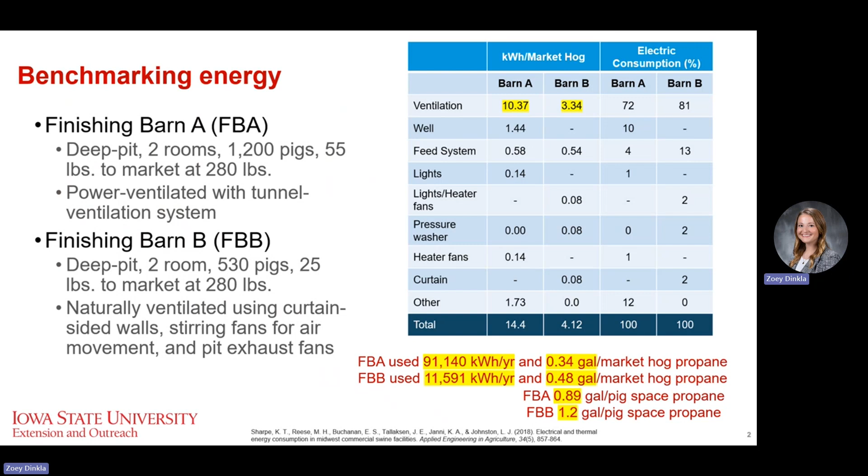Another study here, done about 10 years ago, looked at 30 different farms—different types of farms as well—but gives a more representative sample across Iowa, Minnesota, and Missouri. In general, a good summation from the literature is that roughly 11 kilowatt hours per market hog is a good benchmark to start with.

Propane usage is going to range, as we see here, with sites ranging from Minnesota to Missouri, and it changes dramatically depending on the year. This winter in particular has been unseasonably warm, uncharacteristically warmer than average. But in general, on average, this particular study showed about 0.28 gallons of propane per market hog.

There's lots of numbers on this chart, so it's easiest to highlight and draw attention to what a good goal is. These are by no means exact numbers. Depending on the year, you don't really know how attainable some of these are going to be. But when we're looking at grow-finish barns and wean-to-finish barns shown here, at least from an electrical standpoint,

you're looking at a good benchmark of roughly 25 kilowatt hours per space. The goal for propane usage is obviously going to be very different wean-to-finish versus grow-finish, given the requirement for that younger pig to get started. So depending on what your site's set up as, maybe try to keep it limited to half a gallon per pig space per year, or in wean-to-finish probably closer to around 3 gallons.

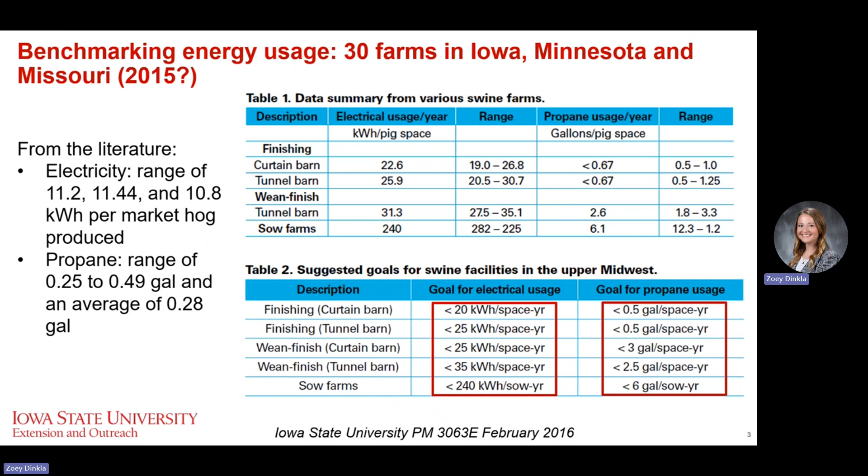Obviously sow farms - I don't know if there's any folks in here with sow farms - obviously there's going to be substantially higher demand, given what it takes for all the zone heating required in farrowing.

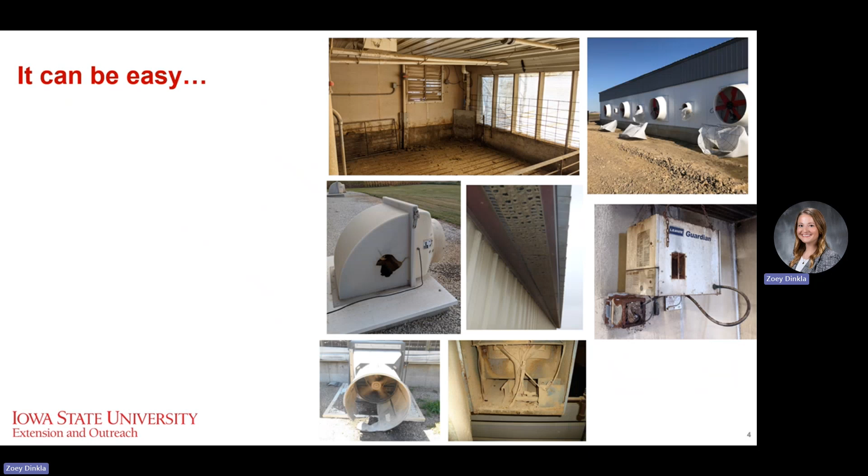So it can be easy - I think in general ventilation can sometimes be made rather complicated, or thought to be rather complicated - but there's lots of different things we can do from a troubleshooting standpoint. We like to think about complex principles with ventilation, whether it's CFMs and properly sizing fans and all that sort of stuff, but there's lots of little maintenance things we can do every day that really help optimize the performance of that ventilation system. And if things aren't working properly, you're never going to be able to really determine optimization within that barn.

So we see plenty of examples here where we've got dirty shutters, broken shutters, a curtain that's maybe not fully in the pocket and creating draft. I think we can all see the pit fan there looks like somebody took their boot right through the side of it, perhaps. Dirty soffits, busted cones off of fans - all different things that are going to drag on the overall performance of that ventilation system.

So obviously we want to be able to manage everything inside the barn as possible, but don't make your job more difficult than it needs to be. If we can do all the little things right and not have death by a thousand cuts, just keeping those little things in check.

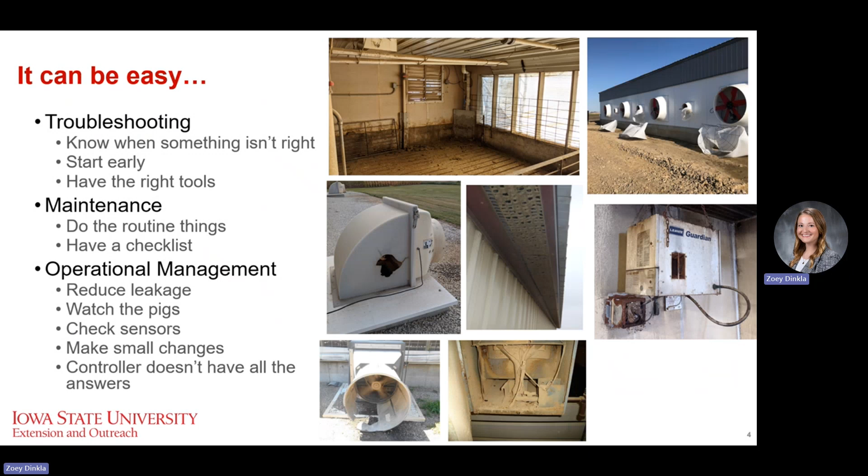So basics of ventilation - this is a thousand-foot view, but we want to draw fresh air in, mix it effectively with the air within the barn, and then exhaust the stale air out. What we're trying to mix is the temperature within the barn - we want to make sure if we're bringing cold air in, we're effectively mixing it with the warm air already in the barn, as well as mixing it with dust and pathogens.

Anything we can exhaust out of the barn to make air quality more favorable for those pigs is going to be important. And at certain times of the year, exhausting gases and moisture is going to be our priority.

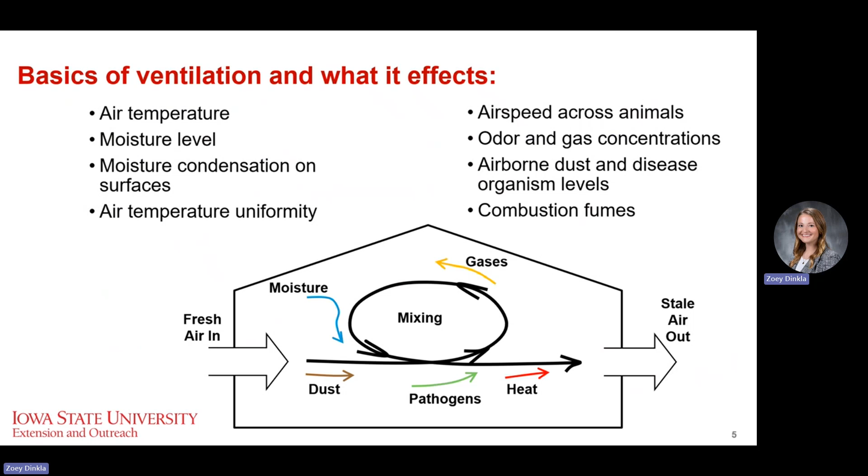So why do we ventilate? Again, a broad overview - outside temperatures exceed our balanced temperature of what we want, so we're ventilating to remove heat from the barn, whether that's a normal increase in temperature from outside or the latent heat pigs produce through respiration or just general heat from having a high volume of very active pigs in the barn. We also want to create, in some instances, a wind chill effect to draw air over those pigs and keep them cool.

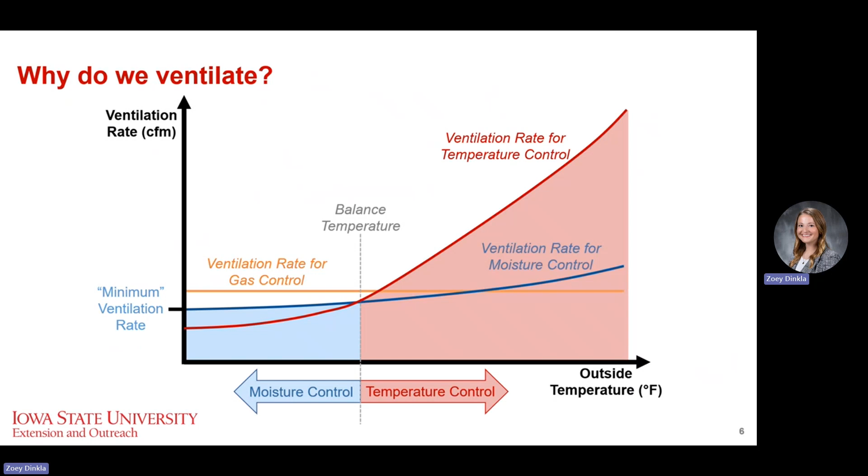Below that, we become more focused on controlling moisture and gases within the barn - trying to keep that at a minimum ventilation rate, keeping relative humidity and any gases at a minimum, while still keeping the temperature comfortable for those pigs in the barn.

This is where it comes in from an energy efficiency standpoint, air quality. We can underventilate the barn and really reduce our costs and propane usage. But what's that going to do from an air quality standpoint for the pigs, from a dust, from a humidity standpoint? It's going to create a more favorable environment for pathogens, and can lead to reduced performance or a nagging cough in the barn. We want to make sure we're providing a healthy environment for the pigs, but reducing our costs and inputs from an LP and electricity standpoint.

Ventilation can consume less energy than heating and cooling. However, there's a certain amount of outdoor air that affects the heat and cooling loads that we have to be able to combat with as well, right?

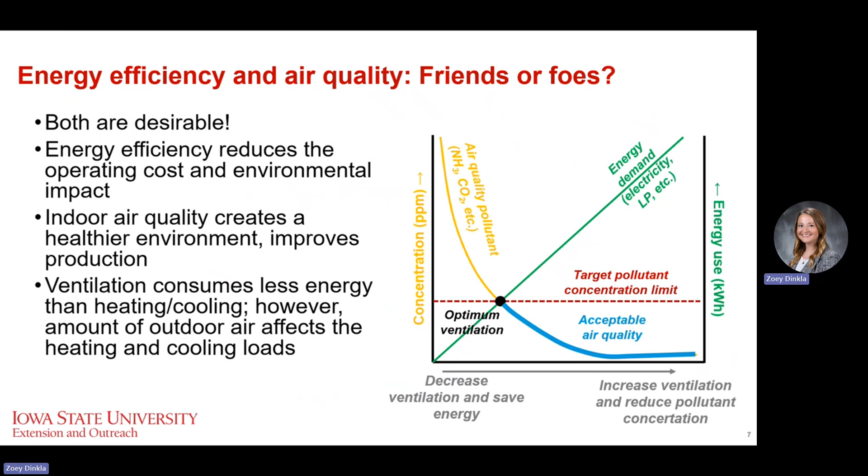The takeaway from this graph is trying to find that black dot, trying to find that optimal zone where we're right above or right below where that target pollutant level is, trying to keep those air quality pollutants at a minimum, but still minimizing our amount of input from an energy standpoint.

Holes in the curtains. Anyone have those? Nobody? Great.

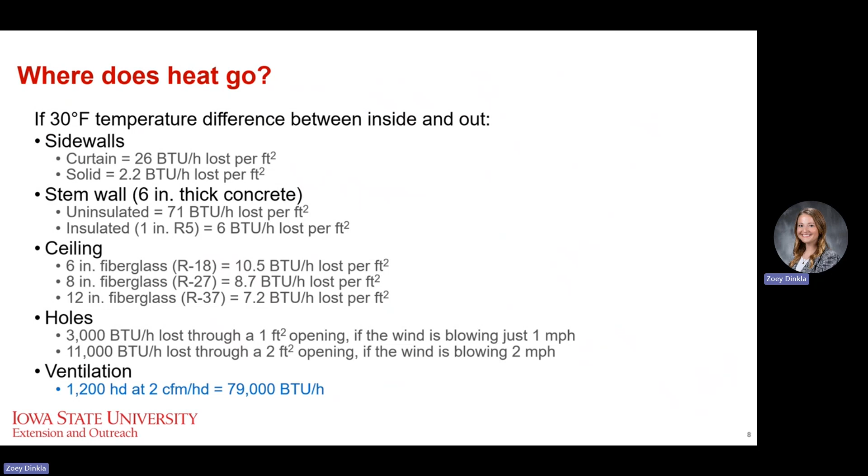So in this case, theoretical calculation at 1,200 head at 2 CFM, 79,000 BTU. I think a gallon of propane is like 90,000 or 92,000 BTU, somewhere around there. So in this case, a gallon of propane an hour, at 2 CFM per head. Again, theoretical calculation shown here.

It's the impact of changing indoor temperature. So the figure there on the left: across the bottom we're looking at room temperature. We've got a wide range there showing different set points where we're looking at roughly 72 degrees Fahrenheit up to 90 degrees Fahrenheit, so pretty wide range, roughly 18 degrees.

Just looking at the difference that room temperature can have on propane usage: if we're looking at 72 degrees Fahrenheit, this is a theoretical model of what we'd expect, looking at 1.5 CFM, we're roughly probably around that 2.2 and maybe up to 2.7 when we get up to the set point of 90. Well, if we're looking at 2 CFM per head, we're already starting at 2.9, and then graduating up to about 3.5.

So basically the iteration there is just to show that CFMs and the amount of heat you exhaust out the barn has a bigger impact than even what variation in this modeled scenario of 18 degrees difference in barn temperature can make. So it's that ventilation and exhausting a lot of that warm air out that has a much bigger impact on propane usage.

A different way of thinking about this and looking at it is with the figure on the right. If we use 2 CFM as our standard and just look at a room at 79 degrees Fahrenheit, and we change it up and down 6 degrees or 4 degrees, what effect does that have on propane usage?

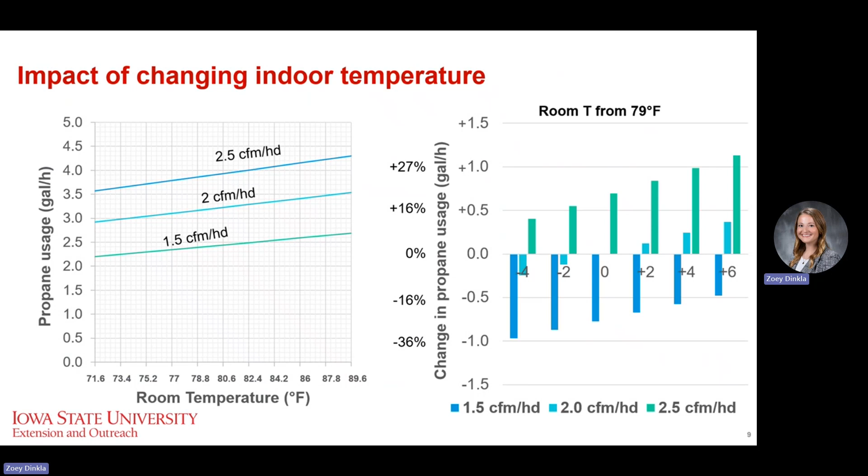Again, a lot of similar information here, but just looking at the temperature difference inside to outside. So maybe looking at 70 degrees difference would have been what we would have had maybe 10 days ago. And obviously the difference we can have there from 1.5 CFM per pig up to 4 CFM per head, again just illustrating the fact that a lot of that air movement can result in a lot of hot air, if you will, going out through the fans.

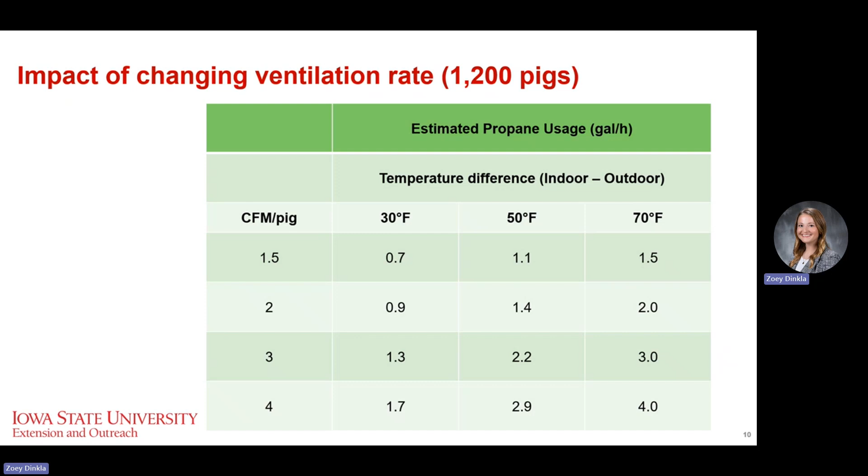So what's the difference between how we design our barn in operation, and how do we calculate that minimum ventilation exactly? Obviously how we design it is going to be challenging because we have to design for different extremes at different times of the year. So we need to figure out what's the maximum ventilation we'll need on the hottest days of the summer, and what's the minimum ventilation we'll need during the wintertime.

So the easiest way from a simple design standpoint is to keep it fairly simple, just using the diameter of the fan times the number of fans you'll need to be able to get that design minimum ventilation.

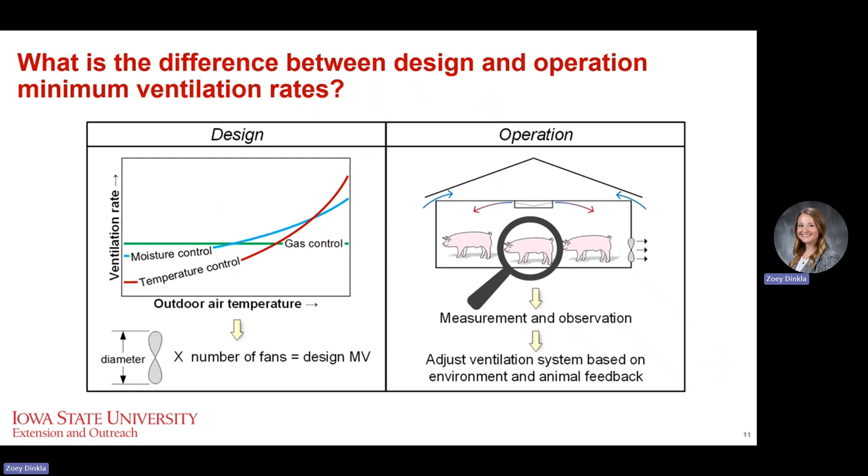And then from an operation standpoint, you're going to utilize the sensors, not only the electronic ones you put in the barn, but also letting those pigs do a lot of the detecting for you, as far as reading their behavior and what their comfort level is in the barn. Looking through there, do the pigs pile? Are they spread out? Is there dampness in the room? What's it smell like? Things like that. So lots of different things you can do from an operation standpoint.

Space heater control, and understanding the differential and offset. Obviously a big piece that we're going to try to keep track of or monitor so we're not wasting a lot of that heat energy going out through the fans.

So we've got a heater on/off, and the difference there, in this figure shown here at 1 degree, is what we would term the differential. And then the offset is going to be from that off time to the set point. The set point is what we obviously put in as our target temperature, and we want to make sure that offset is enough so we don't have a lot of that fresh heated air being put in there and then immediately being exhausted out of the barn.

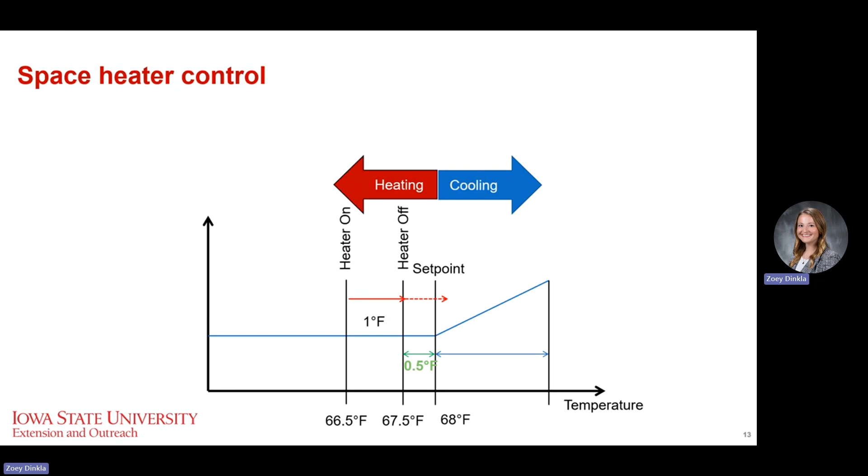So the challenge that can come then is if we have that offset too tight. In this case, we'll show an example at 0.5 degrees. So the previous slide was at 1.5, this one's at 0.5 degrees Fahrenheit. We can overshoot that set point. The furnace will turn on, and then once that turns off, the heat that furnace has put out has to be mixed effectively into the environment.

So in theory, the barn temperature is going to continue to rise. We've just put a bunch of hot air into the building, and then the fan's going to take that out once it gets above that set point, because then it goes into cooling mode and wants to bring the barn temperature back down. So we want to make sure we don't have that too tight, where we're ultimately putting a lot of extra heated air out through the fans.

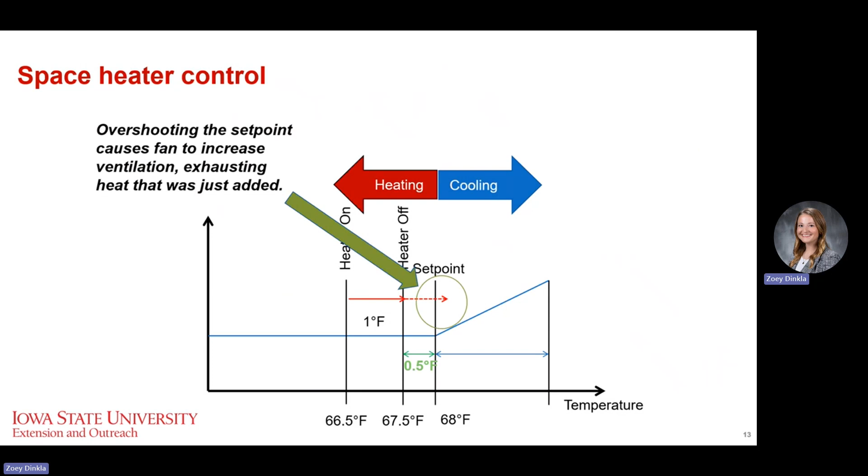So this is a good example to show what the difference is as far as fine-tuning that heater offset. Some recommended heater settings, the ones shown on the left are good ones to start with. The ones here in the graph vary just a little bit, but it's an interesting figure to show.

So to set it up, we've got outside conditions - it's a little tricky to see at the top of that slide - but outside conditions, in this case, steady temperature at 34 degrees. So imagine it's probably an average of a 24-hour period.

The only difference here between the left side and the right side is the offset from the furnace off to the set point. It was 1 degree on the left and 1.5 degrees on the right. So you can see we get a yo-yo, a roller coaster with that furnace turning on and then exhausting air in, which brings the barn temperature down, then the furnace kicks back on.

So the amount of minutes per hour that furnace was running is much more sporadic. At noon, in this particular case, they adjusted the controller set point from 1 to 1.5, and at that point the barn really held its temperature fairly constant for the remainder of that 24-hour period. There was no ramping up of the pit fans, which is what we want to be able to minimize, right?

We don't want that furnace kicking on and the pit fans just pulling that air straight out of the barn. In this particular study, if I remember right, it was like 3.7 gallons per hour of propane burning given the left side of the graph, versus maybe 0.5 gallon per hour on the right side.

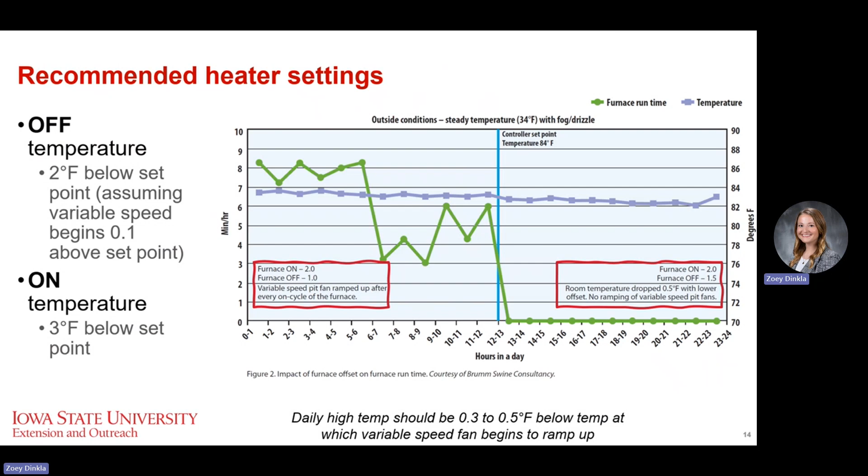So talking about variable speed fans, common questions associated with them: what minimum speed do I use? Does the percent reading on my controller mean percent capacity of the fan? Why does my system behave differently after I've replaced a fan motor? All different things that may come across.

In general, what does 50 mean on my controller? Brett Ramirez kind of highlights this. Does it mean 50% CFM, RPM, the rotations for that fan, 50% voltage, or 50% of some random number? According to Brett that would be true, just because all controllers are going to be a little bit different on what that 50 is going to mean, right?

In general, for variable speed fans, it's important to point out that 50% speed does not necessarily equal 50% CFM. We'll show a graph here that demonstrates that. 50% voltage does not equal the CFM per RPM—every motor is going to react to voltages differently, so we'll show some slides that help illustrate that. And minimum speed should never really fall below 50% RPM.

The thought being there that if there's any sort of static pressure that fan has to pull against, it's going to be a lot less effective at 50%, or if it's got any sort of direct wind going back up against it, it's going to really impede the effectiveness of a fan at 50%.

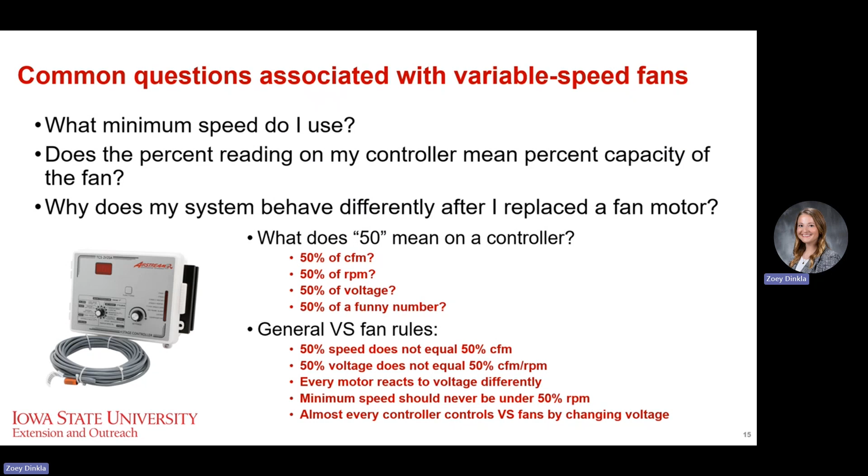So how does your controller work with variable speed fans? It's important to point out, in discussing how we describe the relationship between the voltage that's supplied to the motor and how it ultimately turns that into RPM, that's what we're going to classify as the motor curve. This varies within motor make and model and size of those fans, so different motor curves are going to exist for different sizes of fans and motors.

It's important to be able to select the right curve for the controller to make the ventilation rate increase as smoothly as possible as you're transitioning through, with warmer temperatures throughout the day, to make sure that's a smooth transition as we increase airflow through the barn, right?

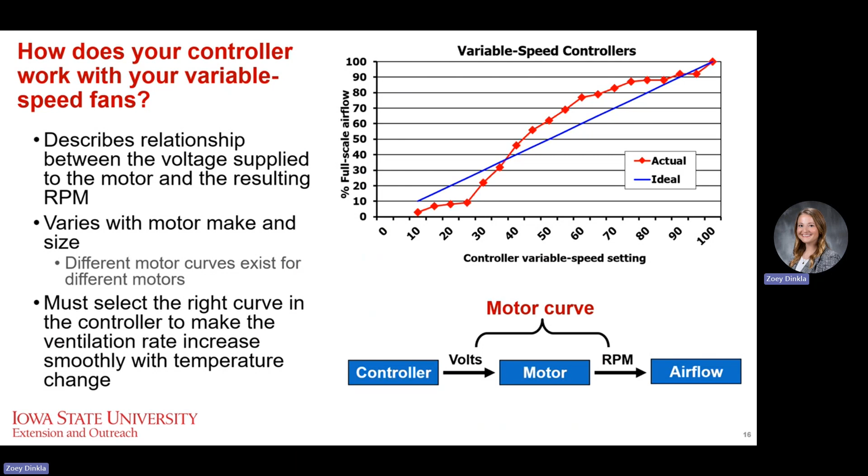So you can see in that graph, as we've got controller variable speed settings, what would be ideal is shown by the linear blue line, and the percentage of that actual airflow that's measured is going to follow that trend line, but it's going to vary a little bit. It's not a perfect science here, but we try to do it as close as we can by controlling those motor curves.

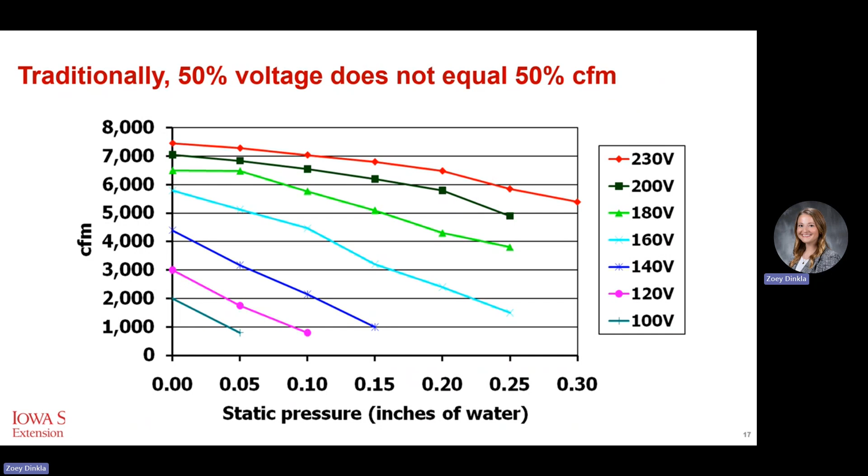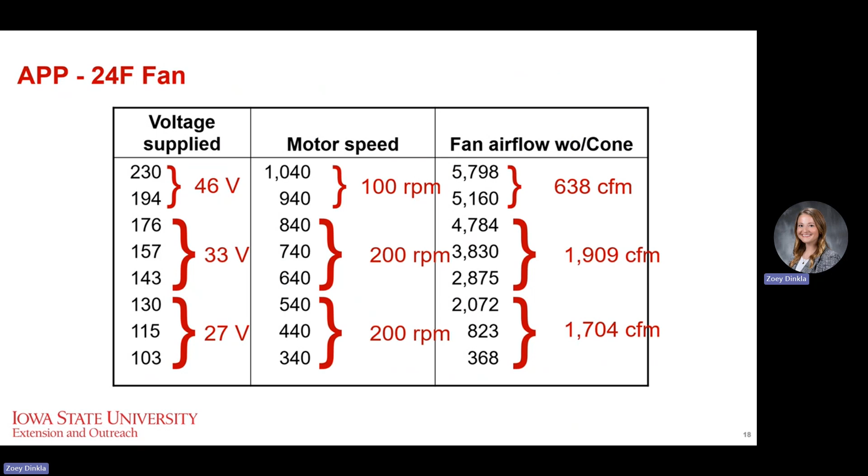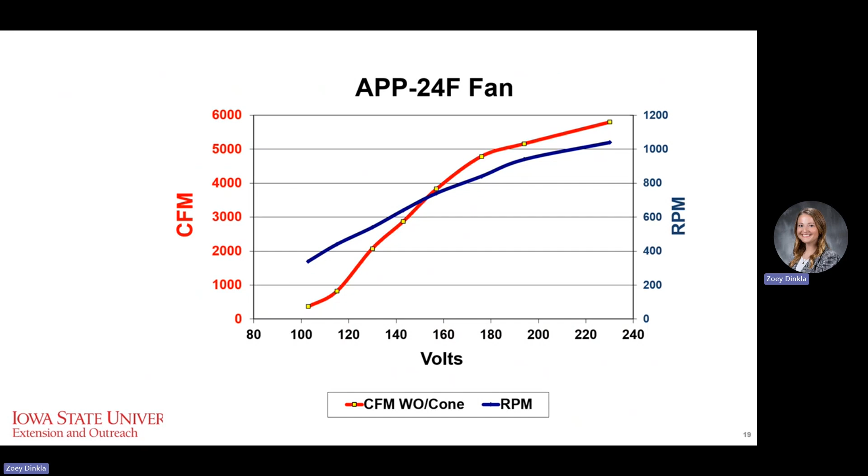For example, here with the APP 24-inch fan, looking at how the voltage supplied can change and ramp up as we look at that motor curve. From 230 to 194 volts, a 46 volt difference, only a change in this instance of 100 RPM in motor speed. As you work down through those different voltages, you get a fairly uniform and linear decline in motor speed, around 100 RPM with each reduction stage. This would be ideal for how our motor curves should look, and it's a better representation of how linear it should be from the RPM ramp-up stage as far as CFM, following closely to that as well.

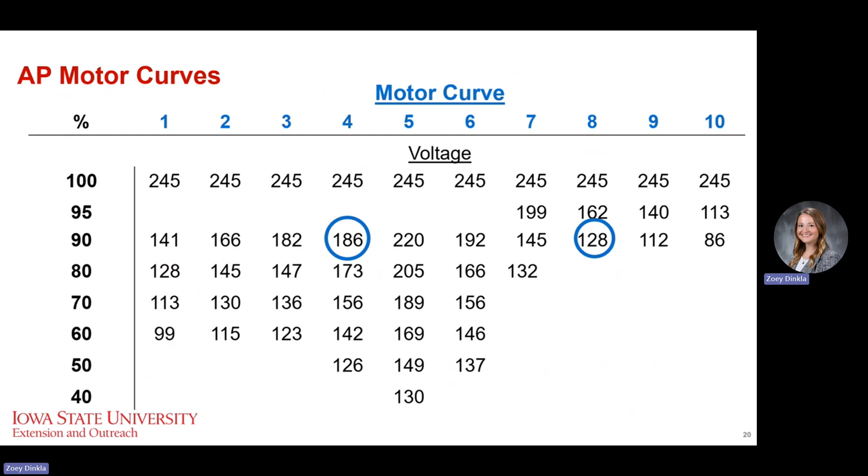So understanding motor curves, that's just the voltage supplied to the fan and how it turns it into RPMs. If we're looking at motor curve 4 versus 8, and both are set to 90, for example, if we had them set to the right motor curve, say motor curve 4 highlighted there, but the motor is actually set to operate on curve 8, it's only getting 128 volts, when ideally it would be getting 186 volts. You're probably not getting the RPMs and airflow through that barn that you'd want. At that point, resizing the fan motor or doing something to increase air movement and airflow through the barn would be important, and making sure the motor curves match is that much more important.

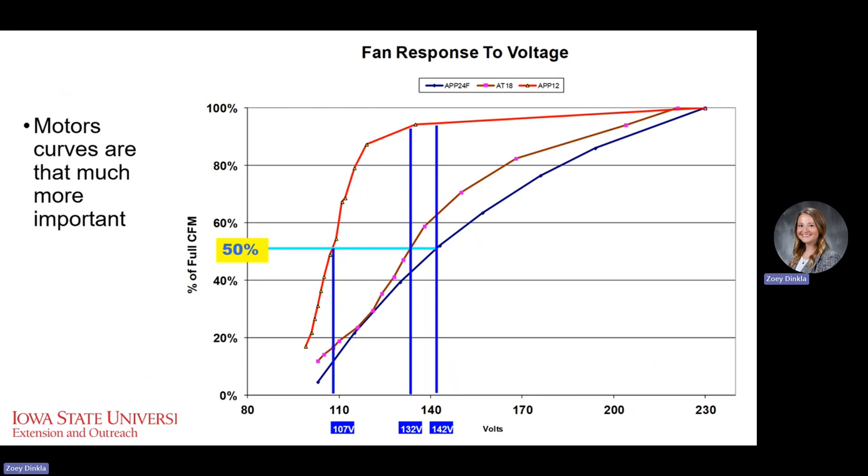You can see in this case a 12-inch fan versus the extreme at a 24-inch fan at different voltages. At one voltage, you can get one fan that's obviously not working near as hard as say even at 132 volts, where that 12-inch fan is effectively functioning at 90% capacity.

So we go to the outside of the barn, and other things we can do to manage effectiveness and efficiency of that ventilation system is making sure those soffits are clean. Even bird netting can collect dust and corn fines, especially during the fall when lots of dust is in the air. Keeping those free of debris, whether with a leaf blower or something, to keep dust off of them, and also checking any insulation stops at that point.

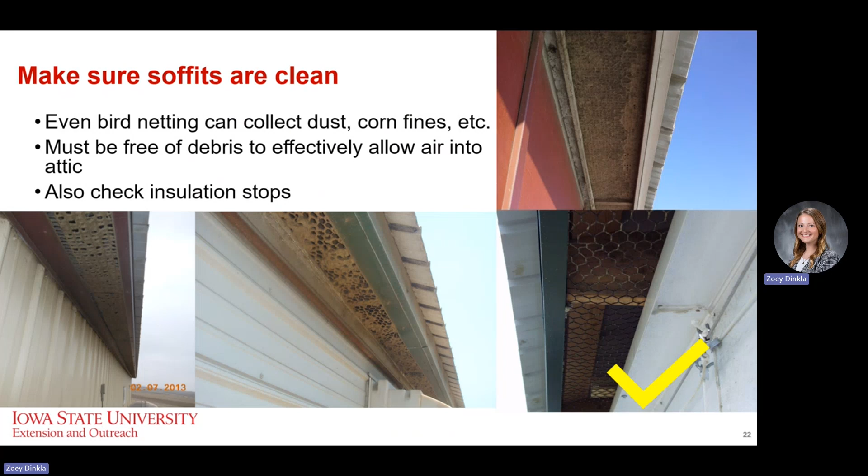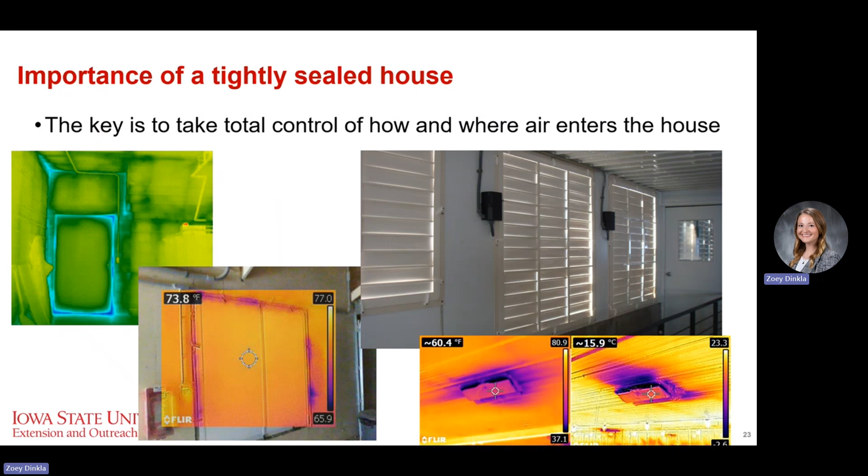And making sure your inlets are sealed up well. Looking at it from the left versus the right, one is getting that cold air and sending it out and away, helping with mixing into the environment, versus the one on the left where you've got air seeping in from all sides of that inlet.

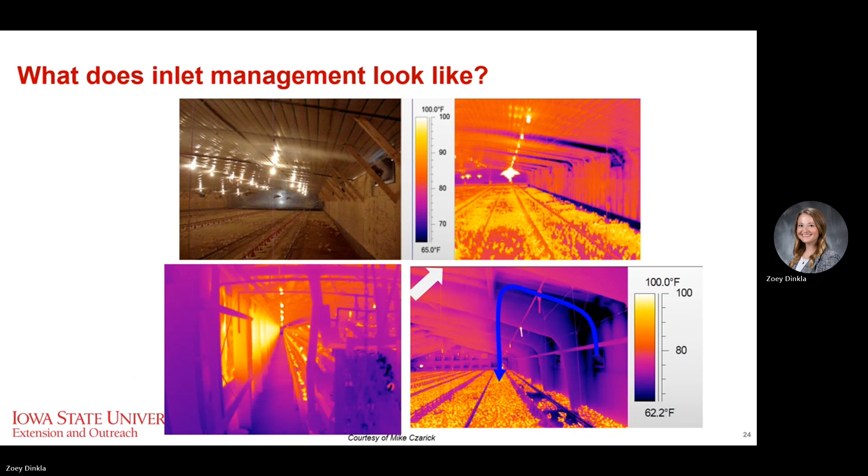So just some common causes of increased energy costs: gas line leaks, and we've already talked about variable speed fans. Two things you could really do to help minimize costs are keeping the barn tightly sealed to minimize cold air infiltration, and making sure the offset for that furnace is tuned in properly so we're not sending a lot of expensive heated air out through the fans.

Winterization, putting in some sort of bubble wrap along curtains can certainly be a benefit. It doesn't necessarily provide a ton of insulative capacity, but it creates an air gap between it and the curtain, and the radiant heat that comes off that bubble wrap is what the pigs feel, versus the 30-degree radiant heat coming off the curtain.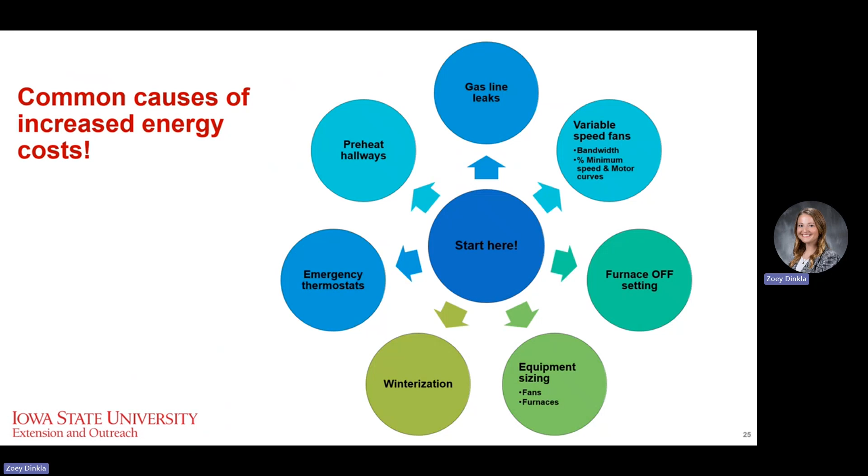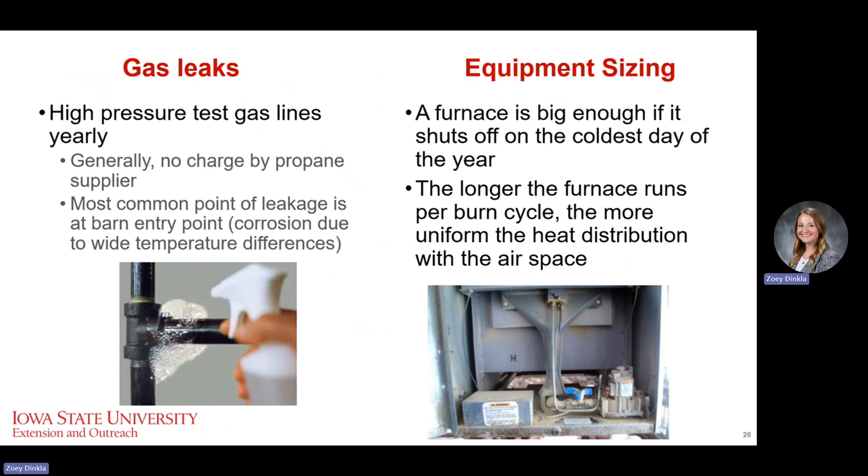Other things to consider: gas leaks, high pressure gas lines, have those inspected. Generally the propane supplier will do that at no charge. The most susceptible points are probably where that gas line enters the barn, where it's subject to a little more weather and wider temperature swings comparatively. And obviously having a furnace appropriately sized for the barn.

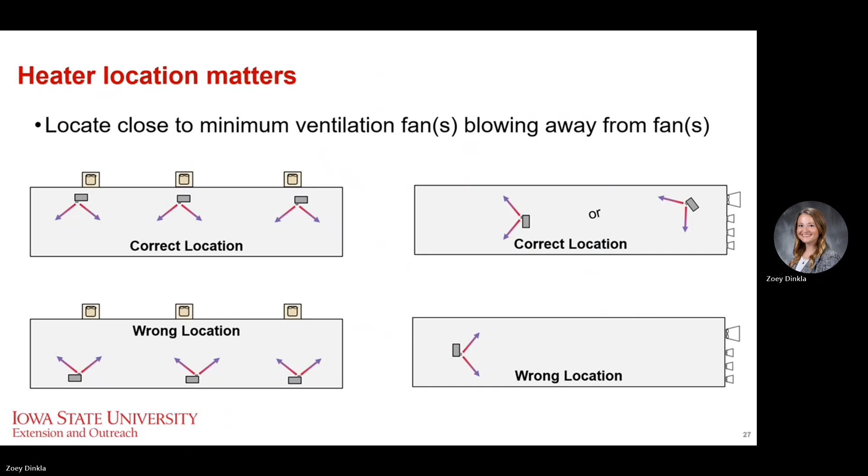Simple analysis and solutions for common problems. If the room's too cold, check and adjust temperature settings, ensure the temperature sensors are located properly. We want those representative of what the pig is feeling and experiencing in that environment, but not so low to the ground that it's not representative of where that air can be mixed within the environment.

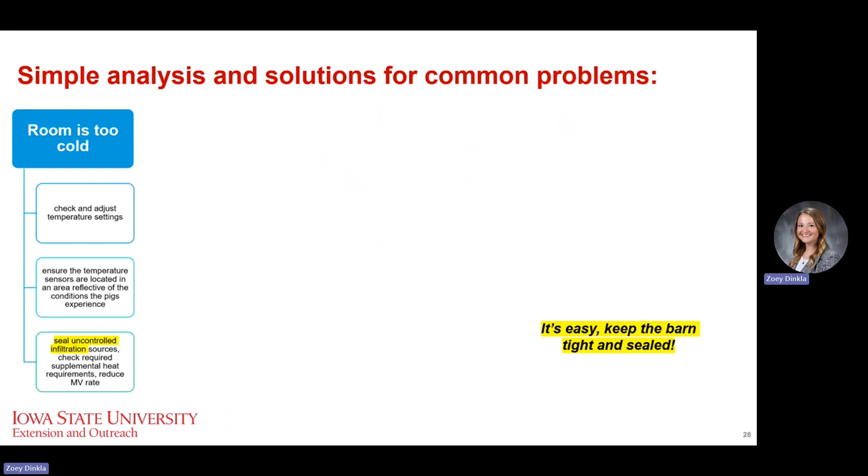Seal uncontrolled infiltration, closing up any holes - you'll see a theme here as we go through this. For cold drafts, adjust the air inlet openings, seal exterior infiltration sources, and potentially look at a second stage fan if we've got too many drafts coming through.

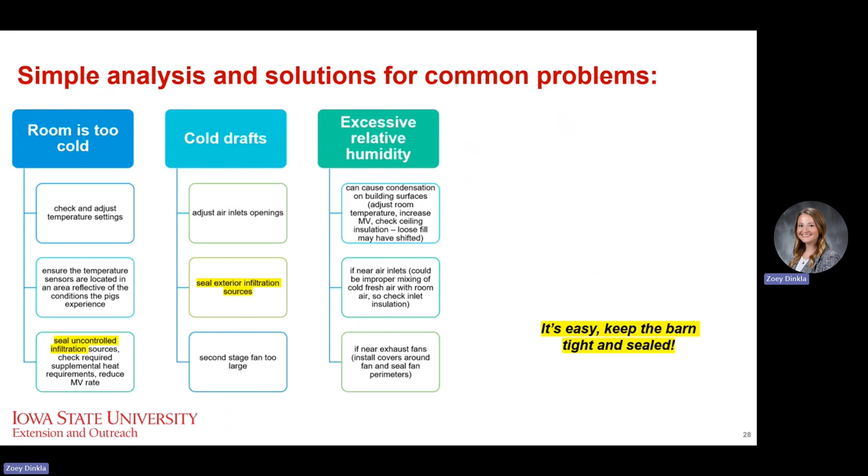For excessive relative humidity, look at increasing your minimum ventilation, checking insulation around the ceiling, and things of that nature. If there's excessive condensation around the air inlets, maybe we need to look at how we're mixing that air through the room. And if it's near the exhaust fans, put some sort of cover around the fan to help seal those perimeters.

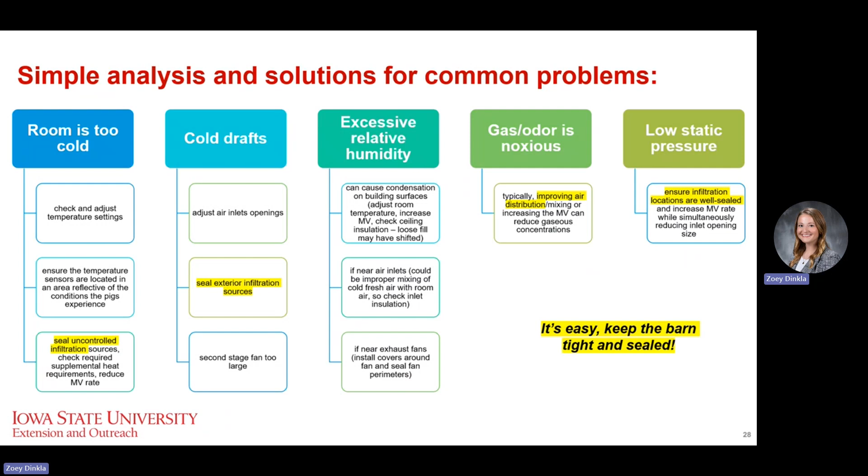For gases and odors, typically improve air distribution, making sure that air is effectively mixed. If we've got low static pressure, ensure we're controlling where that air is entering the barn. We don't want half our air coming in through inlets and the other half coming in through holes in the curtains, because we're not getting as effective a mix with that air entering the barn.